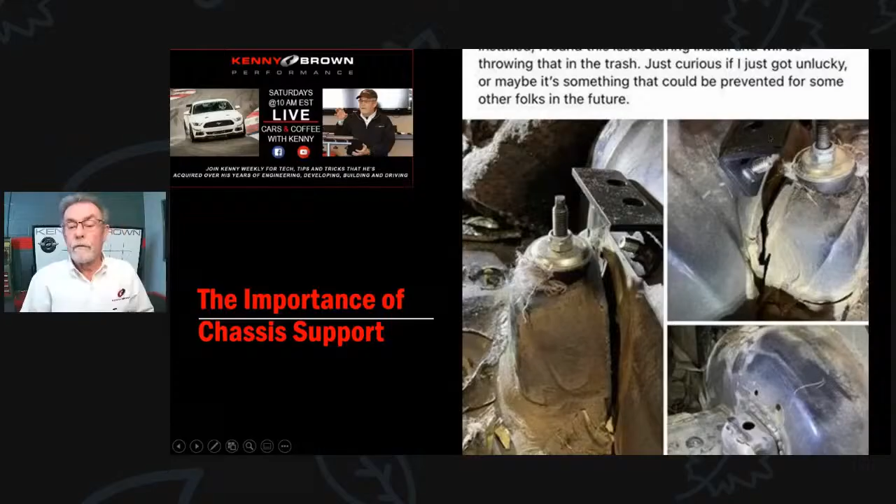Actually, there is, and this is it. This is our rear shock tower brace for the SN95. We developed this back when we started working on the IRS cars in '99 and converting them to coilover. Because we were converting to coilover, I wanted all the load, the spring loads, to go right into the rear shock mount, and they really weren't designed for that kind of load. They were designed for just the load of the shock absorber. So we added the 3-point strut tower brace. The whole idea is it captures the shock mount, the shock actually bolts right through the hole in the middle of it, and then there's 2 bolts on the side that bolt it into the mount itself, so it's pretty secure. Then we've got a 3rd one in the middle, so we get some level of triangulation between the 2 shock towers.

And this has made a huge difference. We have never ever had any kind of issue with pulling away. So let me show you real quick.

If I can find me. There I am. Carrie's not here, so I'm struggling with technical stuff today.

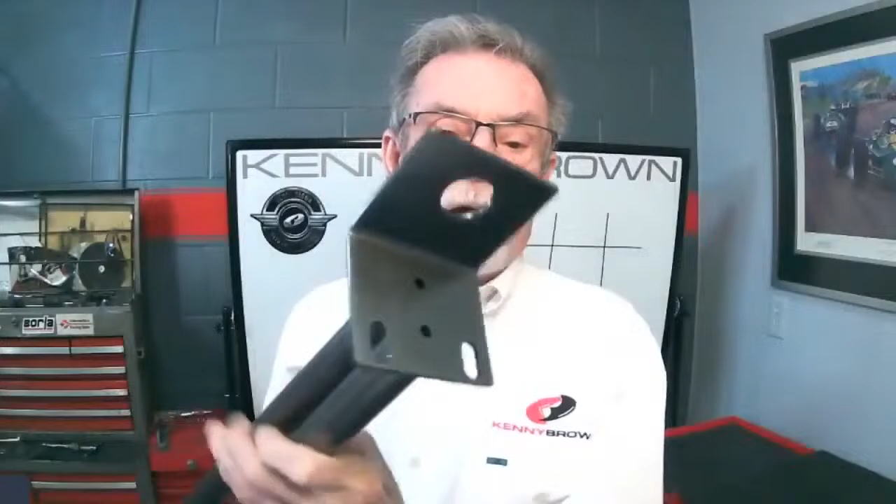Okay, so here's what it actually looks like in person. This is the rear shock tower brace. You can see that we have it so that the shock goes right through, and then we also bolt it to the shock mount. And then there's a third spot in the middle, so you can see we've got a triangulation, and triangulation is the strongest engineering fixture. So let's go back.

Hey, Carrie, did that come up? Hey, Carrie? Oh, she's not there. I don't think Brad's there either. Okay, I'm hoping this is working because I can't really tell. Okay, I'm gonna have to start over. Oh, this is not a good day for me.

There we go. There it is. Got it back.

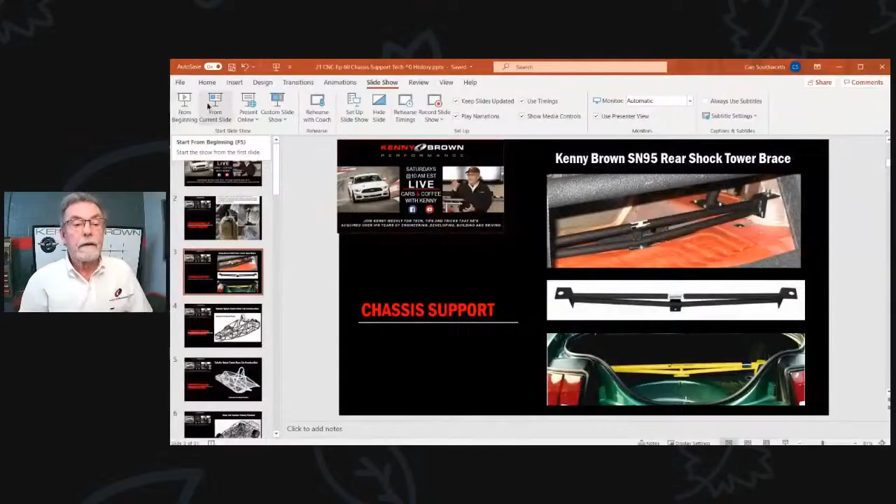Okay, so we got the triangulation, and that supports the shock. The other thing that we do that's different than anybody else is the typical mount for the bayonet type shock in the back is rubber, either soft or hard. Well, because all the load is going into the rear shock mount, we actually use urethane between the shock and the body so that there's no give and it stays firm.

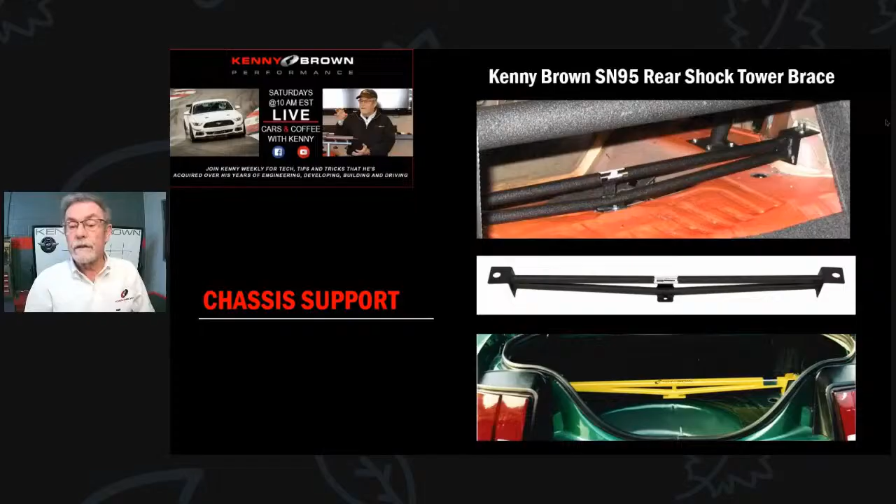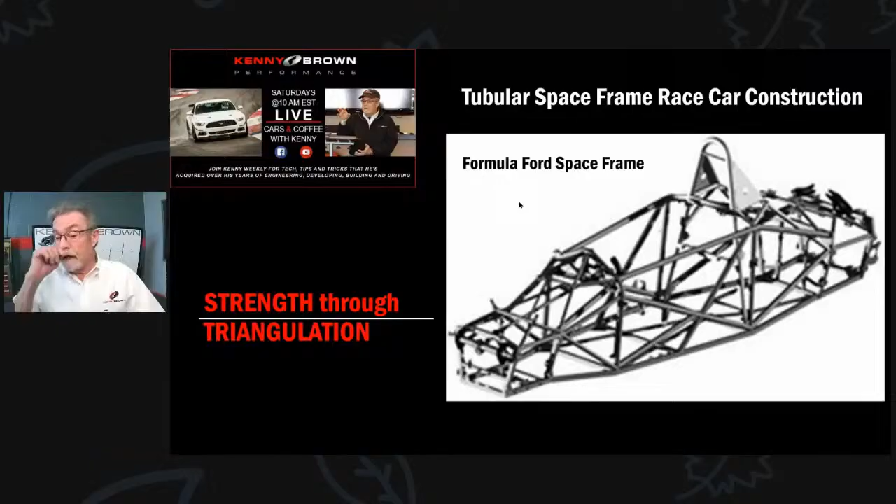I mentioned triangulation. This is getting back to my very early days when I started my racing career back in the 70s. My exposure to chassis strength and rigidity came from working with Formula Ford space frames. Now you can see there's a whole bunch of triangles, and this one's even a little bit better, but the triangle is the strongest, most rigid engineering structure. And all the race cars back then had tons and tons of triangulation. That's what makes them rigid.

The more rigid a race car, the better it's going to handle. The more rigid or stiffer a street car is, A, the better it's going to handle, and B, the better ride quality it's going to have, and C, it takes away rattles and squeaks. So this is what I started. This is how I started learning about chassis and strength back in the 70s.

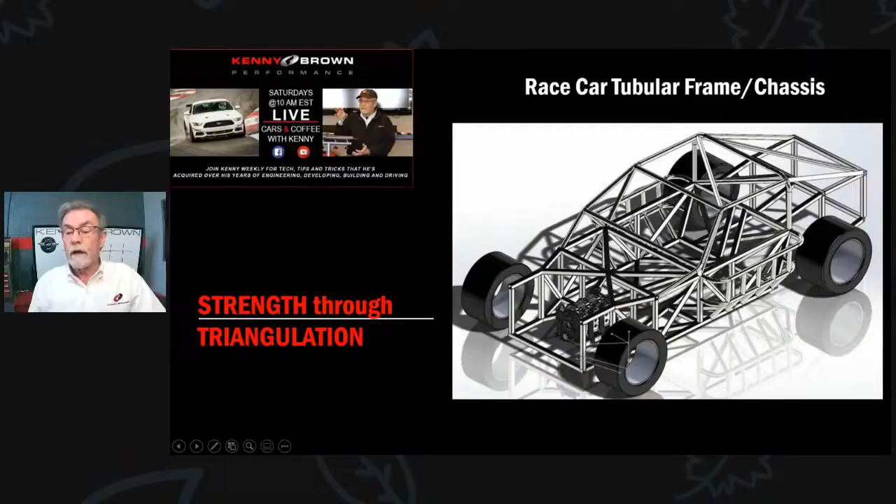But take that and let's put it into like a full-size car, and you can see this is just a drawing of a tube-frame race car. And again, there's triangles everywhere to add strength. But when we get to a production unibody, like all the cars are today, there's no triangulation, there's not much strength. It's just a bunch of sheet metal pieces that are spot welded together, which is why they have a tendency to flex so much. The early Mustangs really, really flexed really bad.

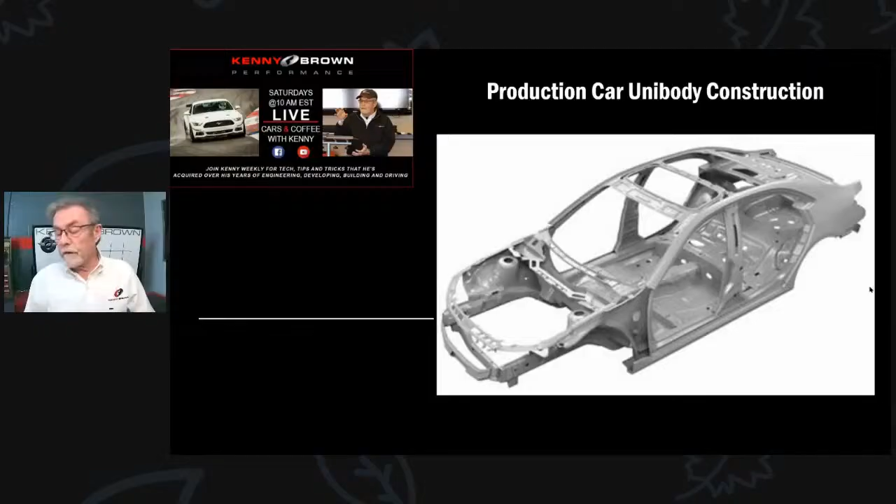So what we did is I came up with some solutions. Like for the race cars, it was okay because we had full cages, which stiffened up the chassis quite a bit. So back in '86, the first chassis thing that we did - even though the race cars had a full cage, the first thing we did was put jacking rails on the side. And we're doing 6, 12, 24-hour races. The cars get jacked up a lot for tire changes, brake changes. So we put a rail that goes right along the pinch weld.

This is actually for an SN95. The Fox is a little bit longer, and I'll show you one of those in a minute. But we came up with a jacking rail so we could jack the car up quickly and easily, and we could jack one side up at once. So after the racing program, we brought that into our street cars, because a lowered Mustang didn't have to crawl around the ground trying to look for a place to put your jack. You just put the jacking rail in there, and you just jack the car up. So that was the first thing we did.

And the next thing we did is to stiffen up the chassis. This came a little bit later. It was the double cross subframe connector. Now this is what here. This connects the front and rear subframes. And what I did, which is called double cross, is we put the bracket in the middle that bolts to the back of the seat. There's already bolts right in the chassis, so it's just a matter of putting a nut on it. And what that does is reduces the free span versus captured length. And then also, it's kind of like, I don't know if you've ever put a yard sign up, either for a yard sale or political sign.

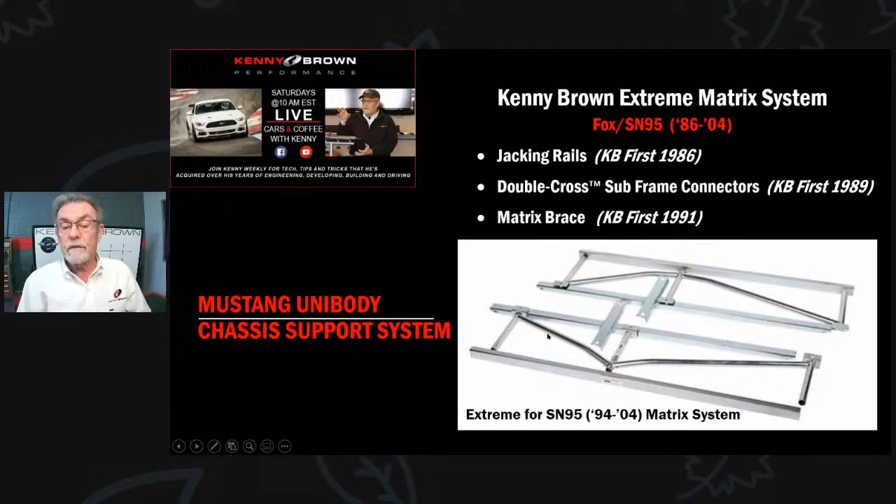By adding the matrix brace here in the middle, you can see that we add 4 triangulations, 4 full triangulations per side. Triangles are the strongest engineering structure. Here's a little different view of it.

This is actually for, I think, the 96, 98 Cobra, somewhere in there. We actually have to shorten them up a little bit due to the transmission mount. But even so, the subframe would be right here, and it still connects 4 triangulations, connects front and back, crosses in the middle so it doesn't flex. This adds an enormous amount of rigidity to the center of the car.

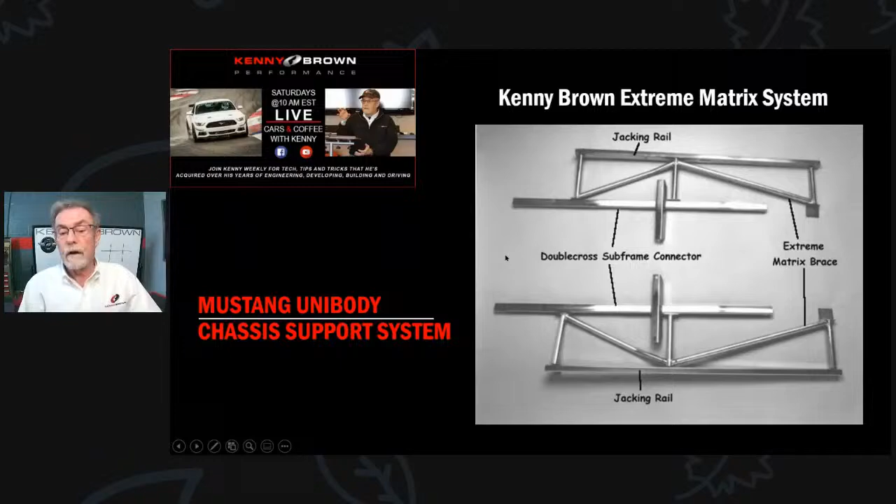Back when we first started doing these, we had drag racing guys who wouldn't want to add these because it added like 10 pounds or something. They just couldn't get through their heads that they're wasting horsepower twisting the body. If they strengthen the body, that horsepower goes to the back. But they just didn't think that way.

So let me show you a few pieces.

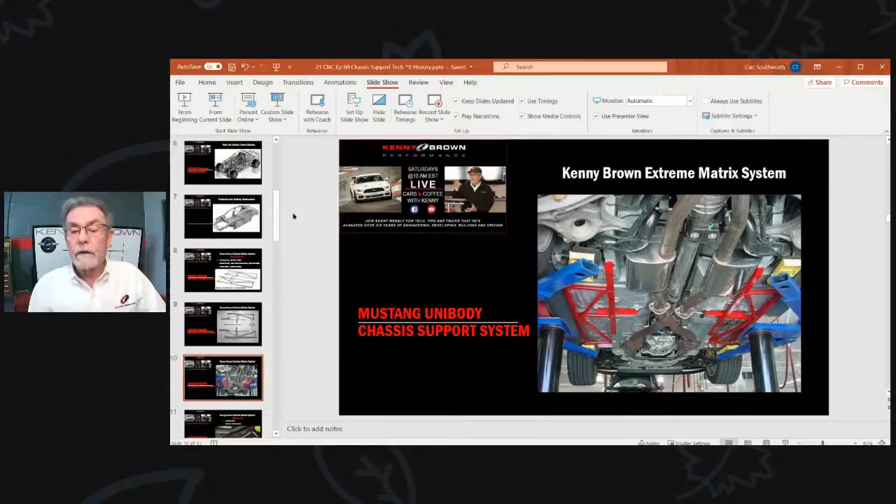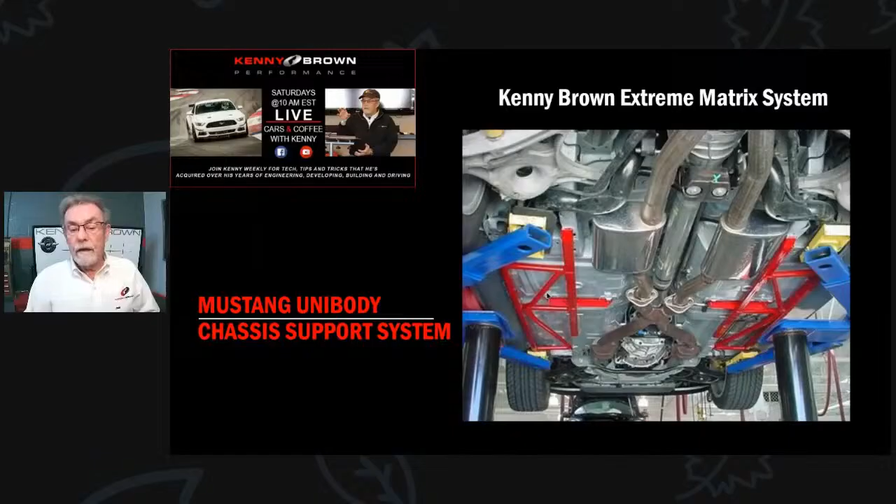So that's under an SN95. Now this would be under the S197. With the S197, they actually have a frame rail that runs front to back, which negates the need for the double cross subframe connector because there is no gap between the subframes front and rear. There's already a channel there. So what we do is we just do the jacking rail on the outside, we do the matrix brace, and then we weld the matrix brace right to the existing frame rail that's right in there. So it works really good.

We had one of our customers decide to use only our products. He got this system for his S197 and thought, well, I'll give this a try and see if it's any good. And he found the difference to be so significant that he's been a devotee ever since. In fact, I think we just set his car up for track.

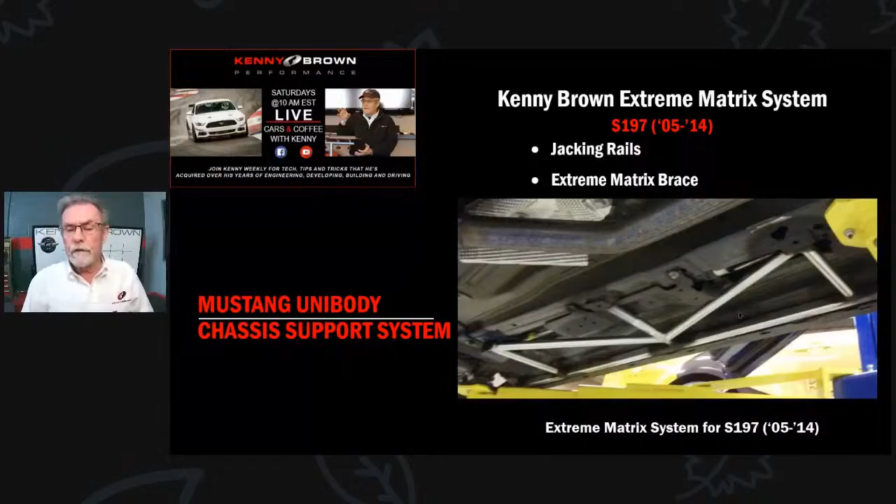Moving forward to the S550 cars, what we found is that underneath the S550s there's a huge difference just in the chassis itself. Much stronger, much more rigid, and they had to because of the new suspension, the IRS in the back, and then the double ball joint MacPherson strut in the front. That requires a much stiffer chassis than in the past.

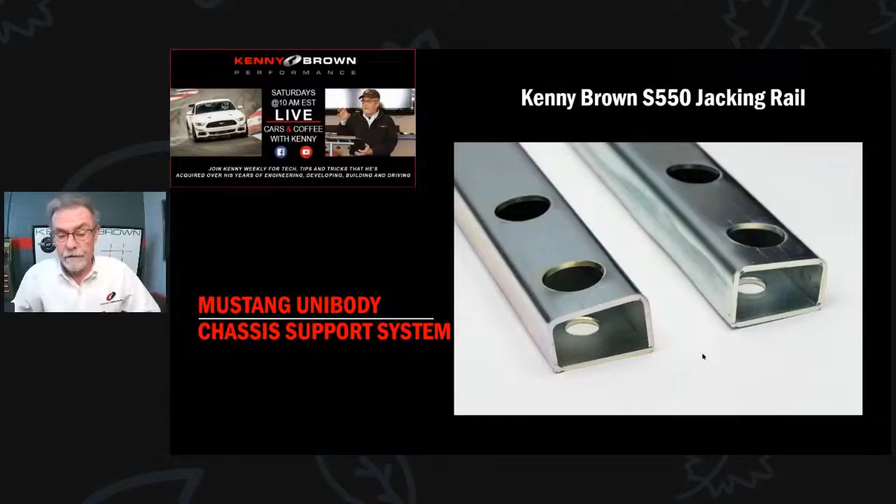So the way they did the underside, it's really difficult to go in and just weld along a pinch weld. So what we did is there are a couple of bolts front and rear that are really handy, and you can see what we've done is we've made access. This bolts right up with existing bolt holes. So it's just slick as can be to bolt right up.

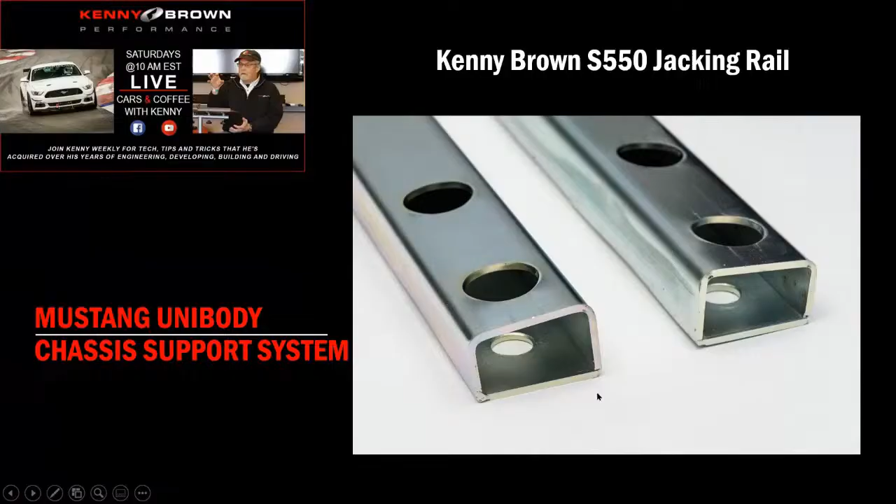But what's unique is the fact that these aren't tubes like everybody else—these are fabricated jacking rails. The reason they're fabricated is because there's a 5-degree slant on the body where this would mount to. So what we did is make the bottom parallel to the ground, so it's level. But because this is a trapezoid and not a rectangle, we get this 5-degree angle in here, so it just bolts up firm to the chassis. It's something nobody else is doing, but we decided this is going to be the best way for the S550 cars.

It's like a 20-minute bolt-on. It's a piece of cake, but sure makes a difference when jacking up the cars. So that's the only under-chassis support we have that's a bolt-on, and not a weld-on.

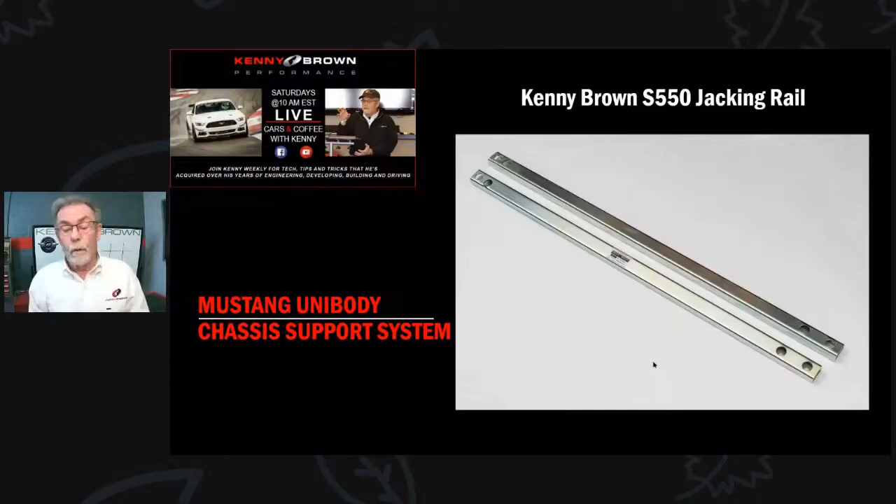For the Fox and SN95s, we weld everything under the chassis because if you're bolting, you're having to create holes, and they're not going to last—it's going to wobble and work itself loose. Besides, Ford doesn't bolt the bodies together. But on the S550s, there are already two strong points, two existing bolt holes, so they're not going to wobble or move around. It's just going to be a really nice mount.

So I think we're going to move on to strut tower braces. The strut tower brace is pretty interesting.

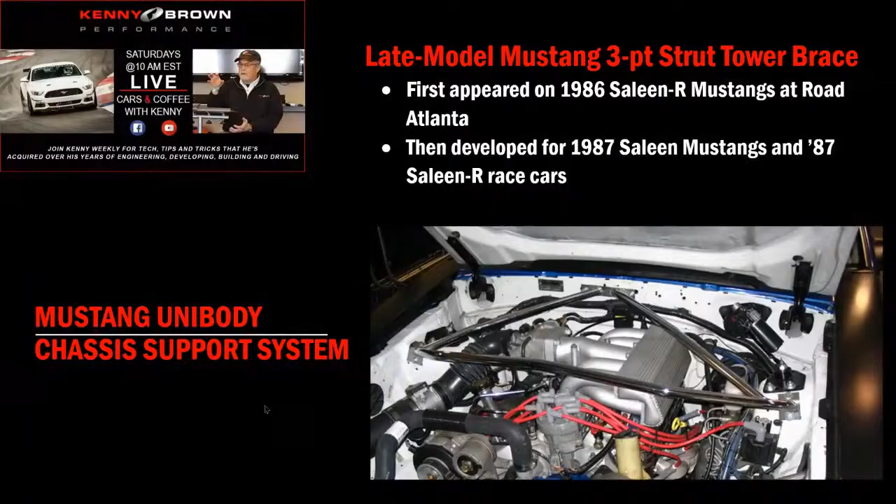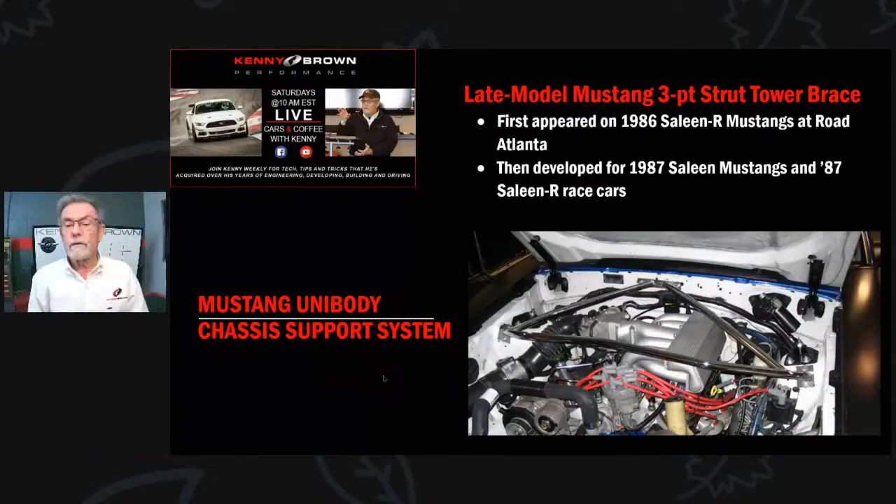Back in '86 in the Saleen cars, we really struggled to make them race worthy. One of the problems was they didn't really want to turn. They'd go like stink in a straight line, but stopping and turning were two big issues. So one solution I came up with was a 3-point strut tower brace, and we put it on both '86 cars for Road Atlanta. Unfortunately, the SCCA tech people said that's not part of the production car, so we could only use it for that weekend, not the rest of the season.

But that was a clue, and it really made a difference. So over the winter between '86 and '87, we re-engineered the whole Saleen street cars so I could get all the things into the production car that I needed for the race cars. The 3-point strut tower brace was part of it, 4-wheel disc brakes another, and 5 lugs too. A bunch of stuff from the race program fed right into the production cars. So from '87 forward, all the Saleen cars had a 3-point strut tower brace. This is pretty close to an example of what was originally on the '86 Saleen cars.

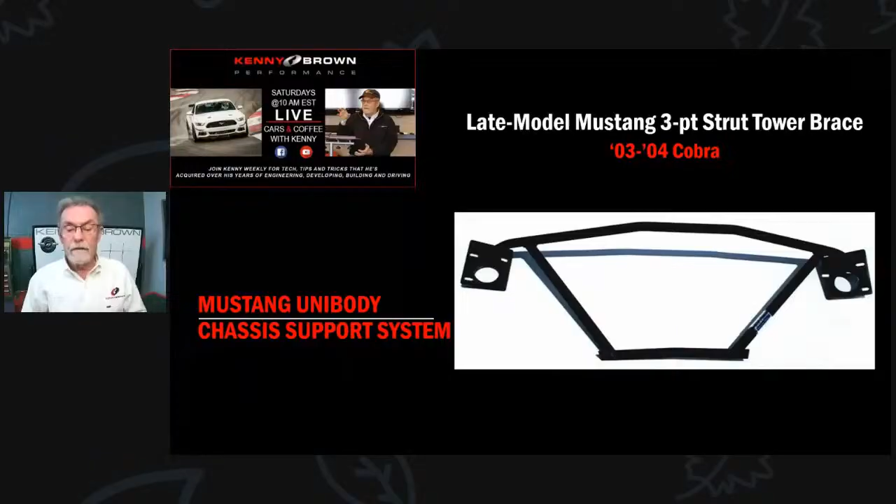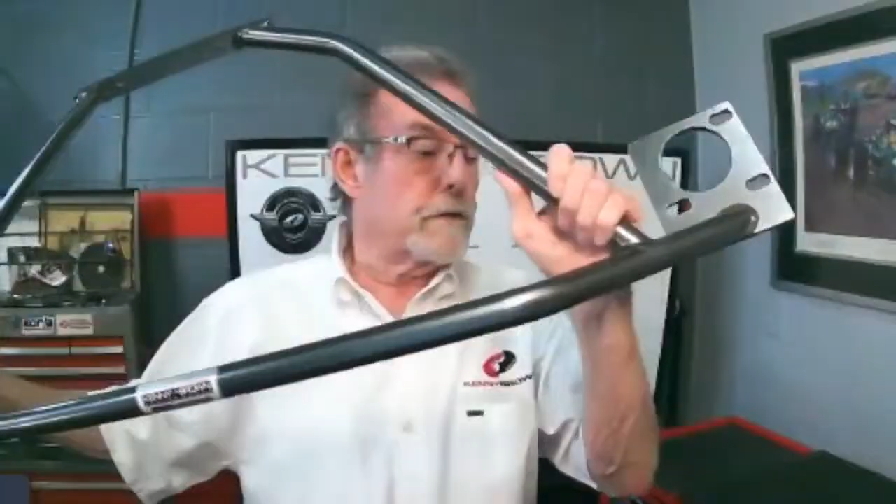Right now we used to have quite a few strut tower braces, but the only one we actually have in production is for the 03-04 Cobra. Again, you can see all our stuff is really super high quality. This is our signature powder coat, a really cool gray metallic. You can see we bolt that right to the top of the strut tower and back to the firewall, and that creates, you'd think it creates one triangulation, but in reality...

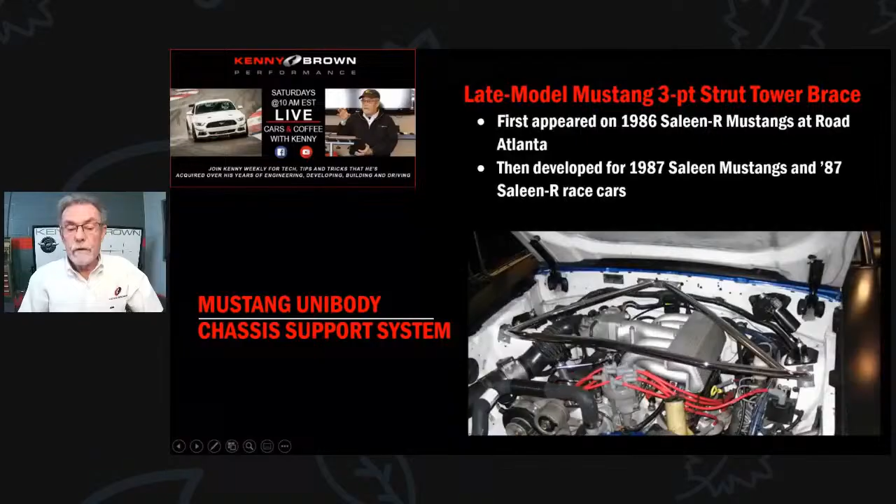I've got to go back to the beginning. In reality it creates 3 triangulations. Here's the most obvious one, strut tower to firewall. But if you take a look, you also have a triangulation here. We're bridging the gap in the corner, which makes this a triangle and makes this a triangle too. So we're actually putting 3 triangles in the front of the car. We put 4 triangles per side under the car and 3 triangles in front. And in the back we're putting 3 triangles too, if you look at the rear shock tower brace. So I love triangles.

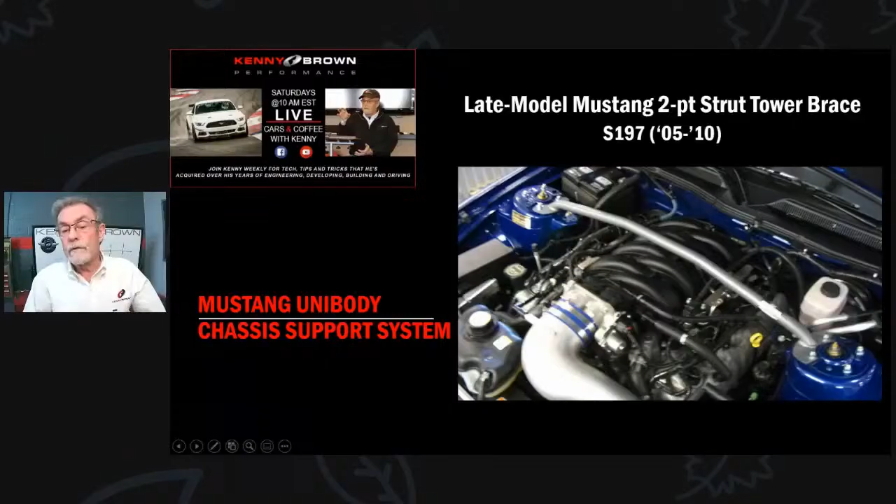Now when the S197s came out, this isn't a firewall, it's just thin sheet metal, a divider between the engine compartment and the firewall. To me there was no real value in tying into that because it was pretty flexy. So we went with a 2-point strut tower brace instead, which made a big difference. So much so that, I can't remember what year, Ford eventually started putting 2-point strut tower braces on their cars. But we were the first to come out with this, back in '05 when the cars first came out.

We've got just a handful of these left, and we'll probably get back into producing them maybe next year. We've got a lot of things to catch up on. Just bringing this new rear suspension to market has taken up a lot of time, but it's moving along nicely. I think we might be almost ready to do another presentation for the next group of people on the new Kenny Brown K-Link rear suspension.

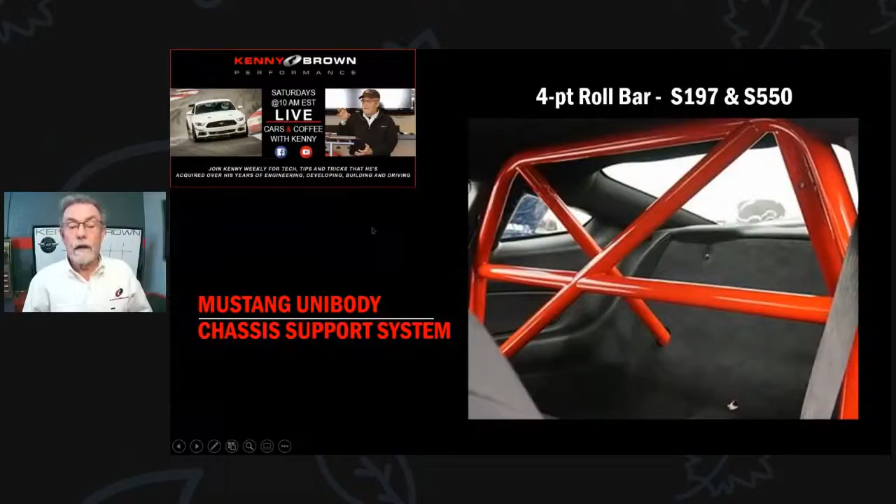Here we go, I guess Carrie put a nice little thing in here. Next week we're talking about IRS versus live axle, and for show and tell, the IRS carrier mod. We do cater and specialize in the 99 to 04 Cobras and the Mustang IRS. Part of our upgrades is we completely changed all the geometry, and that's something we'll be talking about next week.

So I need to... Yeah, I guess I'm back. Did I go? I guess I'm back. Okay, I'll take care. I was really struggling with trying to do the share thing today for some reason. Yep, shows how much you miss me.

So I've actually figured out how to do it virtually, so we'll practice that for the next one. Okay, yeah, because I start to panic when I can't get things to work. And not having here is just kind of... it's kind of like one hand tied behind my back, but I'm getting by.

So that's kind of what we're talking about. The whole idea of stiffening a chassis is, first of all, so the suspension works better. If you've got a chassis that flexes, that ends up being a fifth unwanted and unmanageable suspension component, because if springs and shocks are going up and down, but the chassis is twisting, you don't have any way to control the twist. For the oscillation of the wheel, you got a shock to control the spring oscillation, but if the chassis is twisting, there's nothing there to control it, which is why we go to a stiffer chassis. One of the things people notice right away, like when you put the matrix system on, you don't have to go about 100 yards before you can feel the difference. It's that significant.